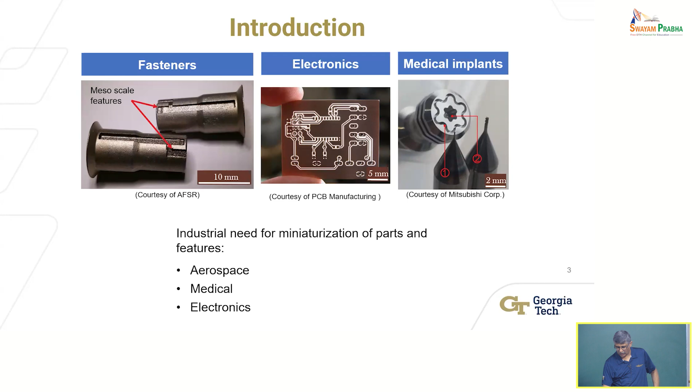So that's the goal. But in reality, some of these challenges apply to objects or parts that are on the order of a few millimeters, okay? Like the one example I showed you earlier on, which is the fasteners. These fasteners are fasteners that you can hold in your hand. You can see them. They're not that miniature, but they have features in them that are on the order of a millimeter or less, right? And then, so you have to produce in large components, small scale features as well, okay? So those also fall under the umbrella of micromachining.

Okay, so we want to be able to create 3D features in a wide range of materials. And why not just use a laser or some other method, right? Because lasers can machine and there's no contact, there are no force issues or very little, at least if any kind of compliance related errors are going to be minimized substantially. Why not do that? Well, part of the reason is that mechanical removal processes are faster, okay? They're proven, you can generate pretty good surface finishes. You can also, to some degree, control thermal damage in the material, okay?

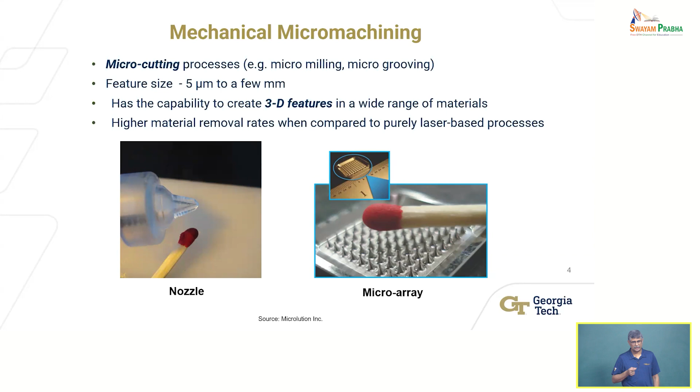And therefore, laser-based, now of course you do have, as Professor Samuel mentioned, femtosecond lasers or picosecond lasers where you essentially are ablating theoretically under cold conditions, without producing significant thermal damage. That exists, but again, they're slow processes generally, okay? The energy densities are much smaller typically. And so they're suitable for certain things, like we're talking about a heart stent that's actually made using a laser micromachining process. So there are reasons to consider using mechanical machining methods.

But what's the challenge? Okay, so now I made the case that there are applications where mechanical micromachining is something that has value. So what are the challenges? Well, if you're going to make small scale features, you need small scale tools. So today you can purchase tools down to 50 micron milling tools, for example, or even less. People have actually produced 5 micron end mills. It's just for novelty. Nobody uses them.

What you can buy commercially, maybe up to 25 microns in diameter, with 1 or 2 flutes or cutting edges on an end mill. You can see one picture here of a typical end mill. It looks like a conventional end mill except scaled down in size, on the order of about 40 microns. Only a small portion, the tip, is where the cutting flutes are, so you're restricted to making small scale features with this.

What's the challenge? Tool strength is a challenge. Now if you're machining soft materials like polymers or very soft metals, then it's less of a challenge. But if you're machining something difficult, you want to make micro scale features in titanium. The biomedical implants, many of them are made out of titanium, chrome alloys, and other types of compatible materials.

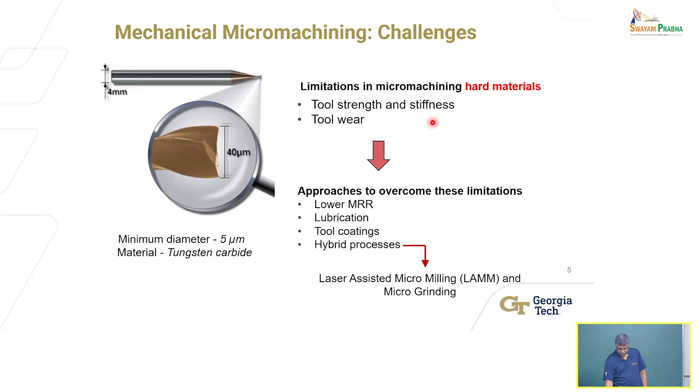The approach is a little different. Softening is one way - thermal softening is one way. It'll work for metals, it'll work for certain non-metals as well, certain ceramic materials will work too. But usually ceramics have a very high softening temperature - that's the strength they need, that's why you use them, for good wear resistance and so forth.

So the basic idea is illustrated in this chart, where you see that you have a laser beam. Laser is one way, it's not the only way - you could use some other energy source to generate thermal softening.

But lasers have an advantage in the sense that they have a very coherent energy source. You can actually tailor the properties of the laser, in particular the wavelength, to match the material. And also you can control the size of the heat source by controlling the spot size, and you can control the energy density as well. Even with a low power laser, you can reduce the spot size, and that power or energy irradiated on the surface over a very small area will give you very high energy densities. So those are the advantages.

And laser technology has come a long way. Today you can actually get laser pointers, a lot of you use them, and obviously they are designed to be safe for you to operate. There are different classes of lasers that Professor Samuel may have talked about, so they belong to a class of lasers where they don't present challenges. But anything we want to use here would be a laser with sufficient energy density that can actually harm us physically.

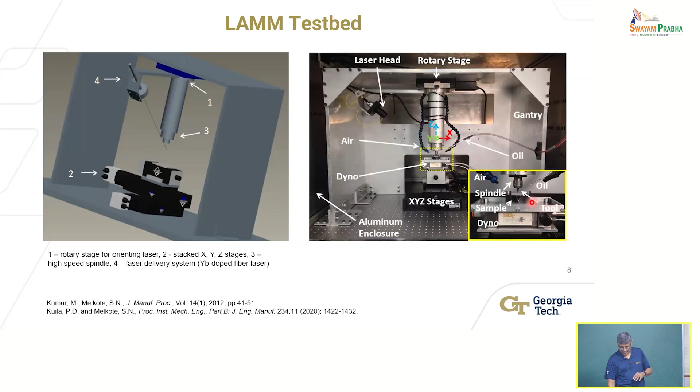So this is a test bed we designed and built for us to do basic investigations. There's a version of this even earlier where we were doing simply a planing operation. One of my former PhD students, now a professor at IIT Bombay, his PhD work was the first one where we did this. But that's not milling, milling is more like grooving operations, but the ideas were the same.

Here's an example of what we did when we built this machine. You can make this in hardened tool steel, a tool and die steel, A2 steel, with about 62 Rockwell C, so very hard. It's heat-treated steel, used for dies and molds. You can produce spirals like this, or even circles like this, channels, just to illustrate what you can do.

You can produce features like this, a grid pattern, and more complex things obviously. You can see the size of these things, on the order of about 250 to 400 microns, and even less. You can do 100 micron tools in theory.

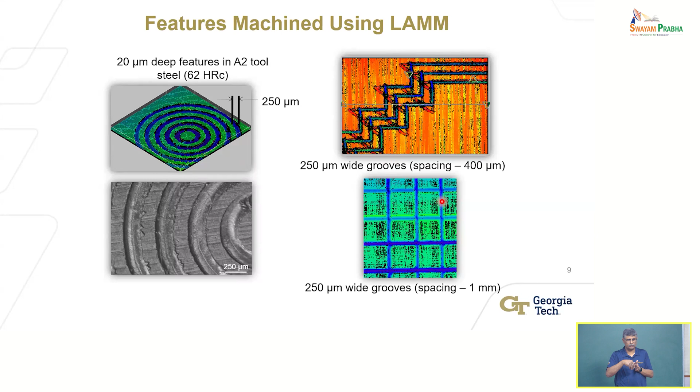Of course, you'll have to control the spot size of the laser to ensure it's not going outside the region that you want to remove with the mechanical tool. So that's the basic idea.

How many of you researchers here know how to measure forces in a cutting operation? What would you use? Dynamometers - there are piezoelectric force dynamometers. They've been around for a long time, used in the lab. You can only generally use them in a laboratory environment to do research; you won't put them on a production machine.

So those tools exist that allow you to measure the forces involved in the cutting operation, which is great, and they have very high sensitivity and accuracies as well. This is a mini dyne, the smaller dynamometer that allows you to make these measurements.

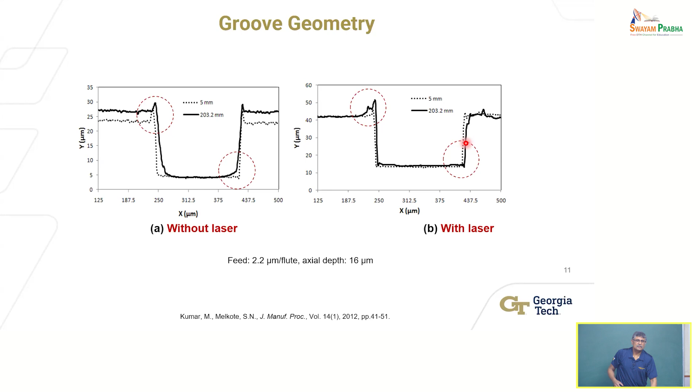Now, I'm making it sound easy. Obviously, in the end, you want some model that tells you what conditions you should use.

So in the end, but initially, this is what we found. What happens to the material below it? As I said, we want to only irradiate the volume of material, soften only the volume of material that the tool is going to remove. Anything more than that is probably bad, because you're starting with a very hard material, and you want the final product to have high strength. Therefore, you want to make sure that after you remove the material, you have not lowered its strength, which would happen if I don't control my energy source or the laser-matter interaction properly, or the amount of energy I'm inputting into the process.

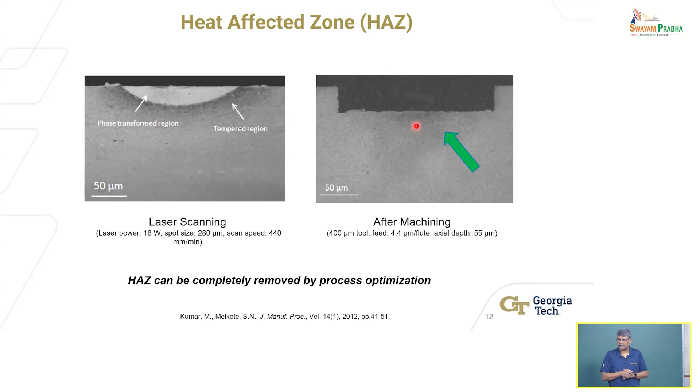So it's possible. All right, what happens to the tool? Well, this is showing you the condition of the tool. This is without any laser assist, the top row, before cutting. You see some material - this is before cutting, so you can see that the quality of the tool itself from the manufacturer isn't so great. There are some things sticking to the surface. This is essentially an uncoated tool, but this could be dust as well - it shows up in a scanning electron microscope as being very big.

But you can see after cutting for about 101 millimeters, there is some rounding of the corners, of the end of the tool. There is also, if you zoom in this region, some microfracturing that has occurred that has led to removal of material.

With laser assist, you see some material adhering, certainly, because now the tool is seeing softer material, so it's going to stick. That built-up edge can be a problem. But you can see that the shape of the tool isn't bad - there is some edge rounding. Now this is cutting twice as long as the previous tool, 200 millimeters, and still it's not too bad, but there is material adhering. That ideally should be removed - it shouldn't happen. You have to somehow get around it, and there are ways to get around it. Without going into further detail, we can talk about it towards the end - ways to actually be investigated, that through lubrication or other methods, you can actually minimize that.

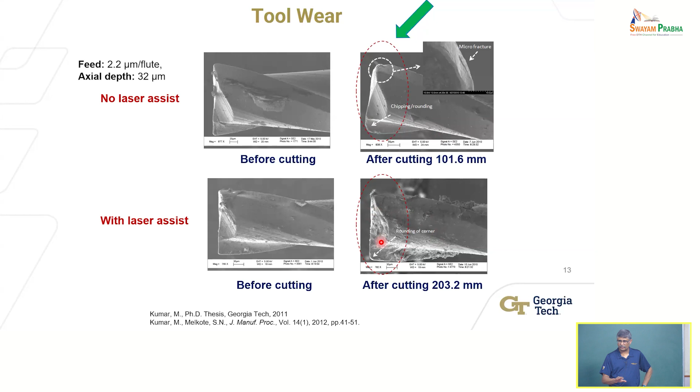Now that was A2 steel. There are other types of materials, right? Every material will behave a little differently in terms of how it interacts with the laser.

This was for an industry project where they were interested in those fasteners, in this case made out of A286, which is a high strength steel. It's an alloyed steel with high nickel content. You can see the nickel content is 24.58%, which is quite high. And nickel, as you know, Inconel is a super alloy used for jet engine turbine blades in the hot section.

So these properties are going to be like that. This is like stainless steel, this particular steel. Its hardness may not be very high, 42 Rockwell C, but tensile strength is high. It does oxidize at 700 degrees C. Obviously, if you're adding thermal energy, you can promote oxidation, which happens much more easily at elevated temperatures.

So we did the study. Now I want to show you a video, since you haven't seen the process. This is actually using fluid, flooding the zone, and micro milling a groove. You can see the groove being milled using some oil-based lubricant here, or coolant.

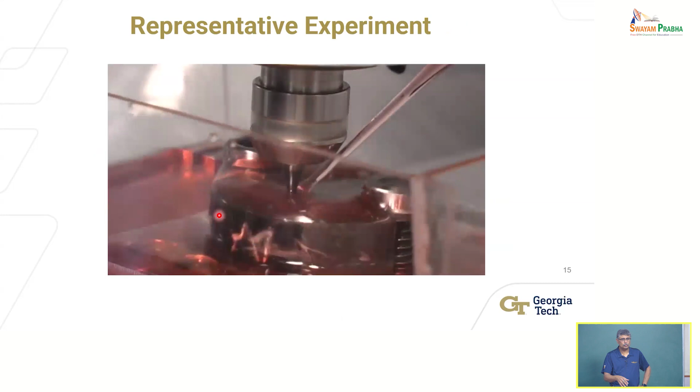But this is without any lubricant, just with the laser. You see the laser, and you can also see the tool is glowing. But the tool is okay, it can still cut.

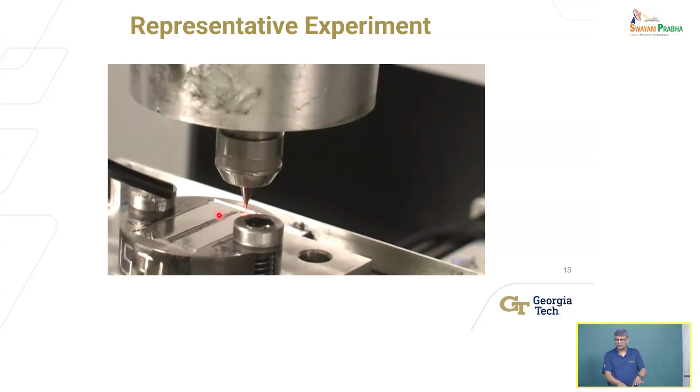But obviously you want to keep the tool as cool as possible, but the material as soft as possible, or heated as much as possible, without melting it. Obviously you don't want to melt it. There will be some ablation, but not a whole lot. That requires some additional methods, but even without that, those results I showed you are using a process like this. This is on our test bed, this video.

This is looking at the geometry, now looking at that cross-section, the depth of the groove along the length of the groove. There's a lot of information here. This is for one condition you see, and for the 4 cases: dry, wet, and with different laser powers. What do you see? The nominal depth was 20 microns, 0.02 millimeters. That is what we were trying to produce.

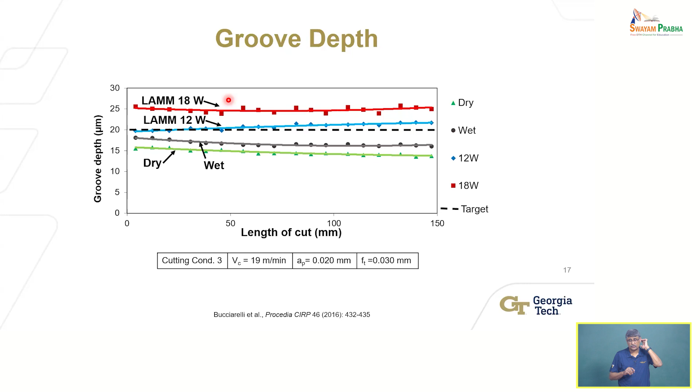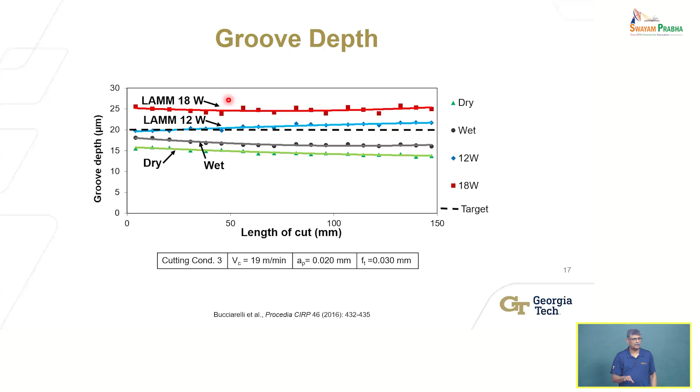That's what's happening, but that's an easy problem for me to solve. I can compute how much energy I'm inputting, estimate the expansion knowing the coefficient of thermal expansion, and compensate for it - meaning if I want to produce 20, I start with something less as my programmed depth of cut. There's a simple solution to it. So that's one solution. But what you do see is that initially, by optimizing the laser power, you can achieve the depth required. That's the point I'm making.

Thermal expansion, how does it increase the depth? The expansion is of what dimension? All dimensions, but usually in this particular case, you're only heating a very small region right in front of the tool, so that's the region that will exhibit the most expansion. Temperature outside the region irradiated by the Gaussian beam is not going to be very high - you don't want it to be, obviously. So much of the thermal expansion is going to be at the point of irradiation and also closer to the tool. There is a distribution of heat, so you will see that thermal expansion.

All right, so you can see here what the tool looks like. This is looking at one edge of the tool, focusing in with an optical microscope. You can see under dry conditions, the tool has chipped - the sharpness is gone. And this is under wet conditions. It's a little better, but it's also worn quite a bit.

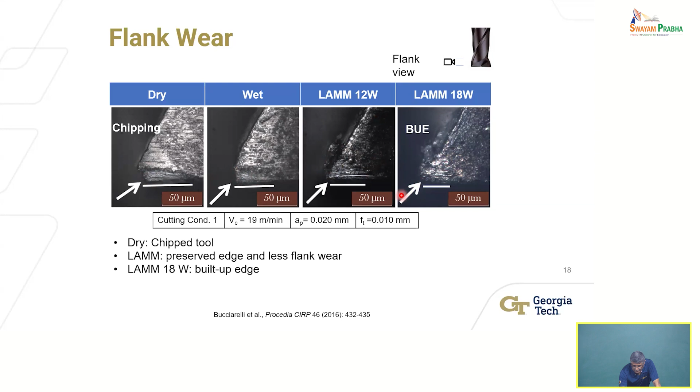This is with laser assist. Not bad - it's still maintaining its sharp edge. There's some material sticking, with higher laser power and softer material - it's going to adhere, etc. So that is to be expected. Not ideal, but expected. This is showing you change in tool diameter because of wear.

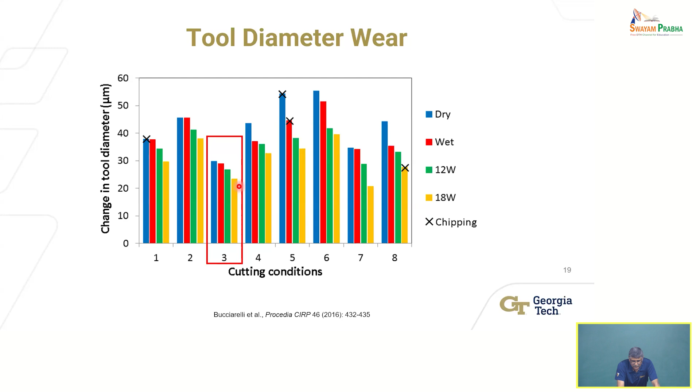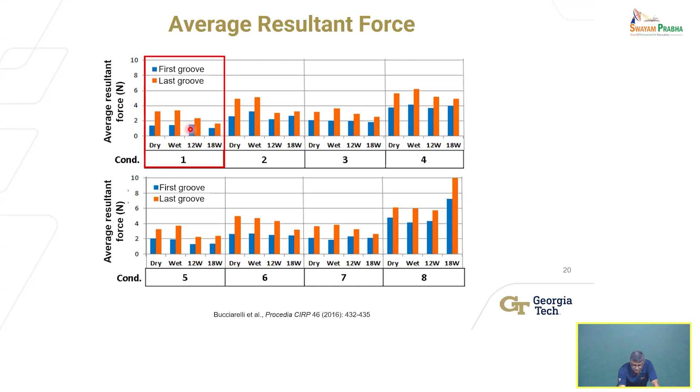So I've presented one idea of how to enable micro-machining of hard metals and alloys, using this thermal softening idea - a very basic, simple idea. Let's talk about...

Other hard materials, such as ceramics. Ceramics are used for many applications - they are very hard, sintered ceramics. Unless you machine in the green state and then sinter it, that's one way people have tried. But usually, there are many applications all the way from medical to non-medical to aerospace applications where you want to produce more complex shapes and features in sintered ceramic materials. You want to use ceramics because of high strength, elevated temperature resistance, inertness to chemical environments, and so forth. So there are reasons to use them, but shaping them and producing these small-scale or even large-scale features is a challenge.

How do they do that in practice? Generally, sintered ceramics are shaped by diamond grinding. They use a diamond-plated wheel and grind - which, as you know, is like a polishing process, like using sandpaper. How long does it take to remove material with sandpaper? It takes a long time and a lot of effort. Grinding is a bit better than hand polishing, more consistent, but you're using a diamond-plated wheel and it's very expensive. That's what they do if you want to produce a groove or something else in sintered ceramics.

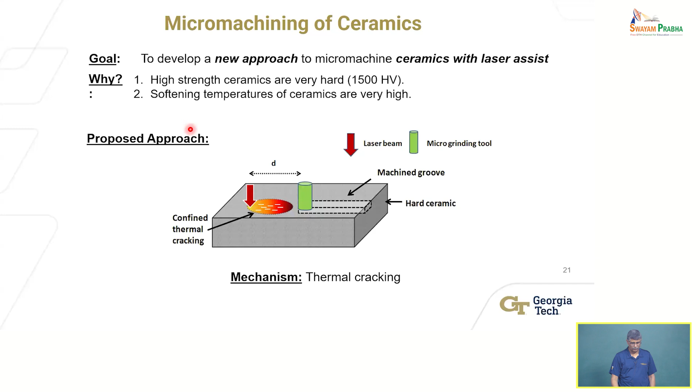That's my hypothesis. In a scientific method, we hypothesize based on our understanding, present a hypothesis, and test it. So that is our hypothesis: can we do this? And indeed, is there a benefit, as I'm hypothesizing, in terms of lowering forces, etc.? So this is what we did.

In this case, crack formation is due to tensile stresses generated during rapid cooling. It heats up and then it's cooled, and it's the tensile stresses generated during cooling, after laser heating.

So I can do this experimentally and do trial and error to adjust the laser power, etc. But instead, a smarter way as engineers and scientists is for us to think about what physics we understand - we have some models. Can we use that to understand what knobs to turn and how to turn them in order to achieve this end result?

We already know the physical concept: I want to generate sufficient tensile stresses to exceed the fracture strength of the material, which I know. So I can use a thermomechanical model. You can do finite element modeling if you want, or there are analytical models that allow you, knowing the energy distribution you're using with the laser irradiating the surface, to compute analytically the circumferential thermal stresses or radial thermal stresses - the different components. Those solutions exist. So we did both in this case.

The only advantage of the finite element model is that you can account for boundary conditions more properly if they're more complex. But if you're only irradiating a very small region, you can treat the whole problem as plane strain or plane stress, and use analytical solutions. It has some limitations, as we will see, but it serves the purpose.

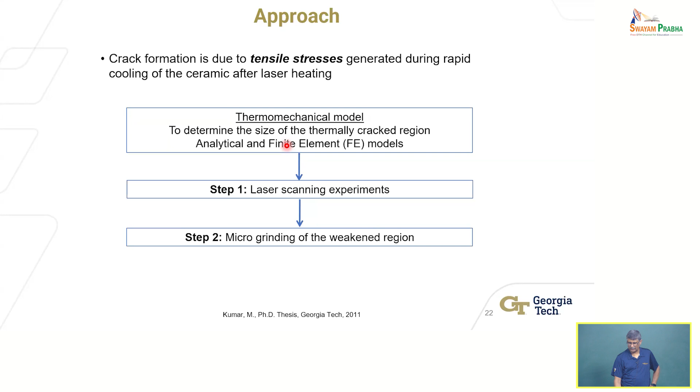So this is the analytical model. It exists - in 1960 somebody worked this out, Boley worked this out. There are some assumptions, obviously - any analytical model makes certain assumptions. The assumption here is a plane stress assumption, which says that H over 2R - R is the radius of the region actually affected by the thermal stresses, and H is the width of this region. They were looking at a disk, essentially. So there's an assumption of plane stress, which we may be violating a bit, but as a first approximation it's an easy model for me to use.

So we did that - you can compute the radial stresses as a function of temperature and coefficient of thermal expansion, alpha, and do the same for circumferential stresses as well. Depending on tensile stresses, where they're generated, they could be generated in the hoop direction or circumferential direction, radial direction, or tensile.

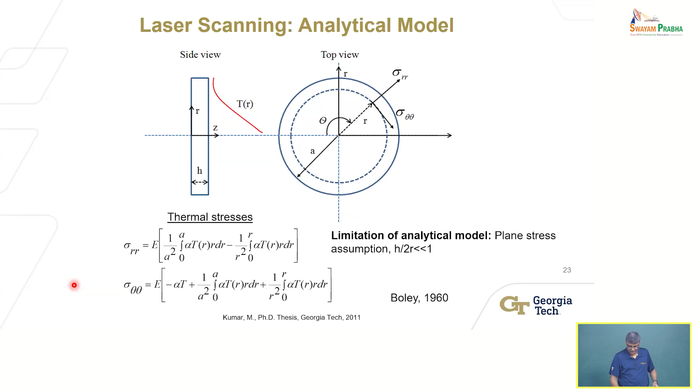If sufficient—whichever one is sufficiently high, that is, exceeds the known fracture strength of the ceramic—then you'll generate cracks, right? That's the idea. So this shows you using that analytical model, in this case with a reaction-sintered silicon nitride,

which is a ceramic, okay? It has a Vickers hardness of 1400, and it's being exposed to a laser, irradiated at 25 watts at a certain scanning speed and a spot size of 280 microns. Under those conditions, this is looking at the radial thermal stress distribution, right? And the fracture strength of this ceramic is 350 MPa. So in this, I put 350 MPa, right?

And this is the distribution predicted by that analytical model for the Gaussian temperature and energy distribution that you're providing as input, as a function of radius, distance away from the center of that circular region being irradiated. You can see that it produces fracture stresses exceeding or at least equal to 350 megapascals up to 195 microns from the center. So within a radius of 195 microns, I should generate thermal stresses that exceed or are equal to the fracture strength of this material, okay.

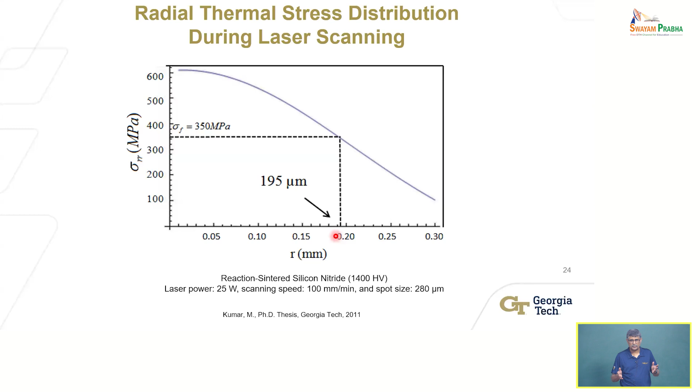So that tells me, by changing my laser power, scanning speed, spot size, I can play with those to determine what size region I want to generate these thermal stresses that exceed the fracture strength of the material using such a model. That's a much smarter way for us to do this, rather than just trial and error, which you would have to do experimentally. It's expensive to do—you don't want to do that. So that's the advantage of this.

Now, we are making some assumptions here. How good is my plane stress assumption? It may not be a perfect assumption in my case, given the geometry—I'm using a block, not a disk, and so forth. So the boundary conditions could be different, or the assumptions being made in terms of plane stress may not be as good. We will see—so we want to test that hypothesis as well.

So we use a finite element simulation where I can relax many of these assumptions and apply the boundary conditions. For boundary conditions, every node starts at room temperature, or in this case, whatever the temperature distribution is being imposed by the laser on top of it. Then you fix all the other nodes at the bottom, because you don't want rigid body motion—otherwise you won't be able to solve the problem. And you solve this, it gives you the temperature distribution.

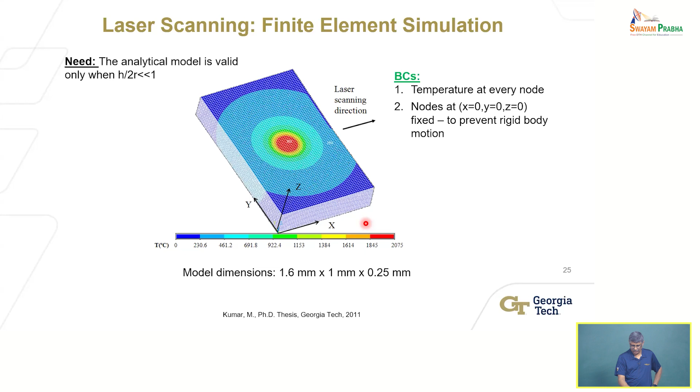From the temperature distribution in a finite element model, you can also calculate the stress distribution. So this is showing you the radial thermal stress distribution for, in this case, scanning in this direction at some point for the same conditions. So I can do this using a finite element model or the analytical model.

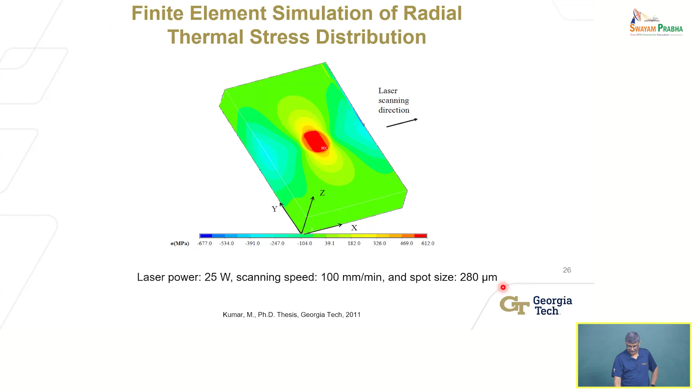This is showing you what happens if I actually do this in an experiment. Same conditions, and I have scanned the surface of this reaction-bonded silicon nitride, and this is looking at the cross section. You can see here that there is a depth of affected region, 30 microns, according to what I can see from this image. And there is a small region here, outside of the white region, that actually is amorphized, okay.

So essentially, it's like taking all these—what is a sintered ceramic? Particles have been bonded together with heat and pressure. So you basically disaggregate these particles, and it becomes amorphous, like powder. Powder is amorphous, right? So that's really what has happened here.

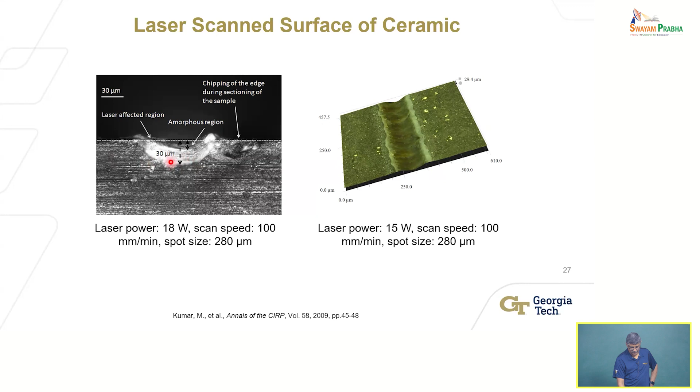And you can see that indeed there is also some ablation—you can see there's already a groove that has formed of some sort. Some of it is because this amorphized powder can fall off, since it's already weak—I don't even need to grind it, okay. But the region below it is weakened, but it's not amorphized, okay.

That's what has happened. So now, this depth of the heat-affected region—I can predict it using this model, because I have a model which tells me what the distribution of radial stresses and circumferential stresses in this volume are for given laser parameters and scanning conditions.

So here is a comparison of using the analytical model, the experiments, and the finite element model. Depth of heat-affected region, I showed you a picture, 30 microns.

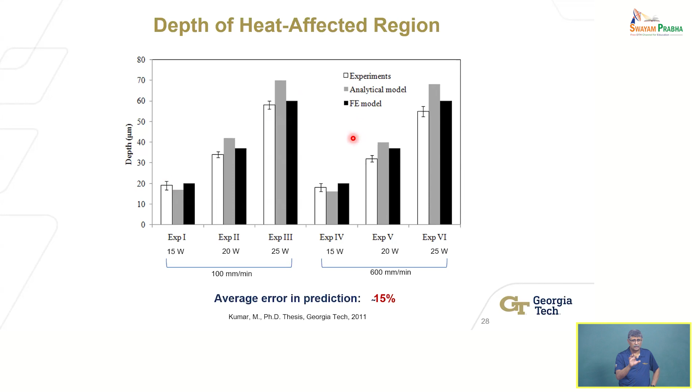In this case, changes when you're varying the laser power. Here the laser power is increasing for one speed - this is slow scanning speed. The next one is same laser powers, same trend, but for a higher scanning speed. In general, at a higher scanning speed, you can see the depth is a little less. Any idea? Does this make sense to you that at a higher speed, it's less? The depth to which I am impacting the material and weakening it is less?

Less heat generation at higher scanning - why? Higher speed changes the rake kind of. There is no rake, there's no cutting here. There is absolutely no cutting. I'm just scanning, there is no cutting at this point. This is only scanning the surface with a laser. Interaction time is less, exposure time is less. So therefore, obviously, the mechanism by which heat is transmitted is through conduction when laser and matter interact.

And so indeed, yes, you're right that it is less, and it's less because at higher speeds, lower temperatures are produced due to lower interaction time. So it's not surprising - this type of common sense check you should be doing. Does this make sense? Does this result make sense based on my physical understanding of the process? Don't accept everything that you see. You have to question it. Am I getting it right?

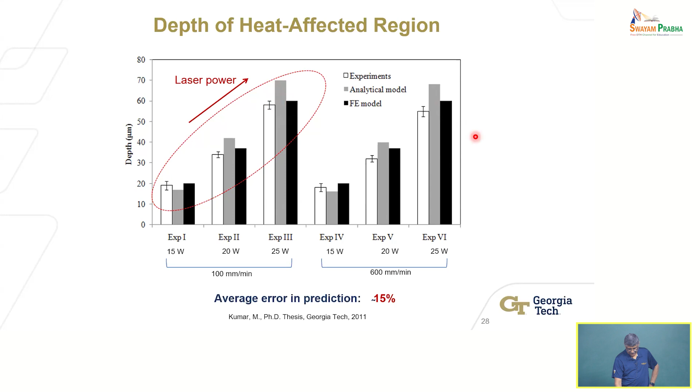So because of that, we need to scan - this is what has been done. But when we have overlapping passes, reheating is possible. Yes, indeed, that would complicate things. It could, but the thing is, you have already cracked regions. So at most, what would you do? You would probably burn off the binder some more because it's already amorphized. Or below the region that is amorphized, you would further crack it, maybe. So that's not a bad thing - as long as it's within the depth to which I want material to be weakened, it's okay. So indeed, yes, you are affecting it. Now, that overlap, the design of how much that overlap should be, also needs to be optimized.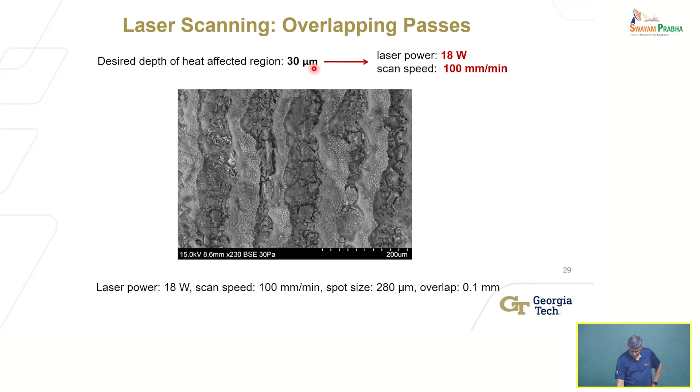All right, so we did this. Now we grind - now the cutting tool comes in. After I weakened it, now I take a tool and it's like me taking a tool and scraping off. Intuitively, that's what I'm trying to do.

So here is measuring the grinding force. In this case, you can see it's for one condition - I gave you some data, you want more data that's in that paper. Laser power of 15 watts, spot size of 280 microns. And you can see here, without and with, there's a number of grinding passes, because you can't remove all of this in one pass. Because some region is amorphized, very weak, but you want to produce a 30 micron depth. Below that, it's weakened, cracked, but not completely amorphized to just fall off - it requires some force to remove.

So there are some forces, but you can see here that in general, the average and maximum forces are shown - this is basically the average force, the solid lines, the dashed lines are the maximum values. And you can see that for the laser assist, it's much lower. So I've tested and proven my hypothesis that this will benefit my ability, make it easier for me to remove the material.

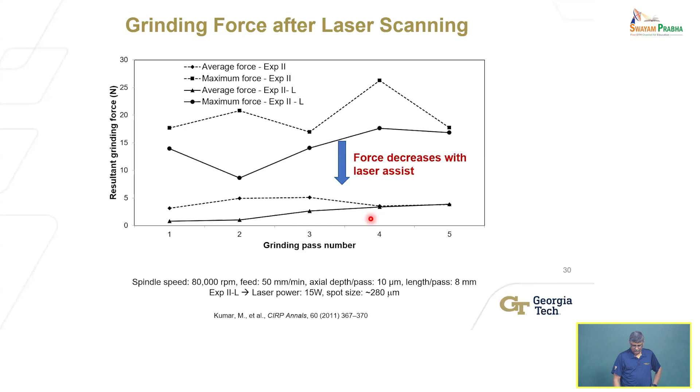Back when we were doing this, we found only one vendor. Now the Germans actually make better quality tools, and today you can buy much higher grade diamond micro grinding pencils. This was almost 15 years ago when we did this.

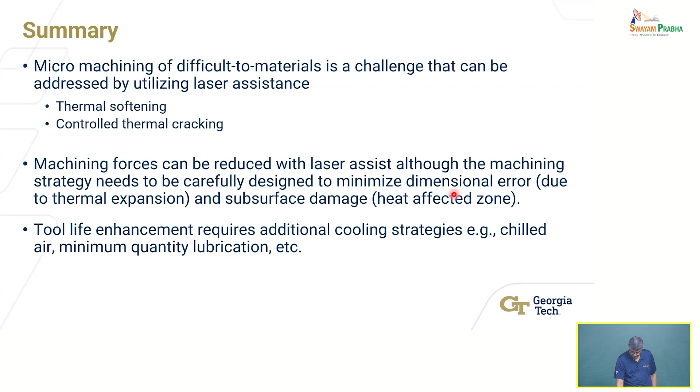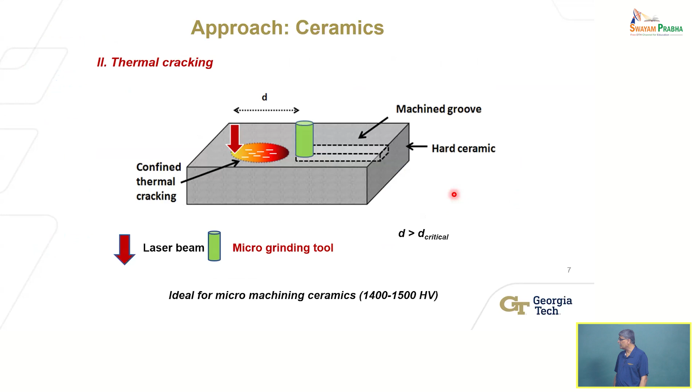The basic idea is quite simple. This is thermal softening for metals. You have a laser that is irradiating the volume of material in front of the tool. The tool is moving in whatever direction, but there's a laser spot directly in front, some distance away. That distance d is a process variable you have to adjust and optimize. The region irradiated, shown by the red circle, is affected by the laser interacting with the material, and heat is generated when laser-matter interaction occurs, which I'm sure Professor Samuel talked about.

So that heat softens the material directly in front of the tool. By the time the tool comes, the material it sees is softer than it was before the laser irradiated it. That's the basic idea. What happens to material when you heat it? It softens. A very simple concept.

Sir, why can't the laser be tailored to the dimension of the milling area, since it's basically a rectangle? Indeed, it can be tailored to a rectangle to minimize the area—that's called laser beam shaping. But it's not simple, you need much more sophisticated optics to do that. Why do I need to do it? I mean, you can, but just because you can doesn't mean you do it. It has to be economical. If you have lots of money and time, then you could do that.

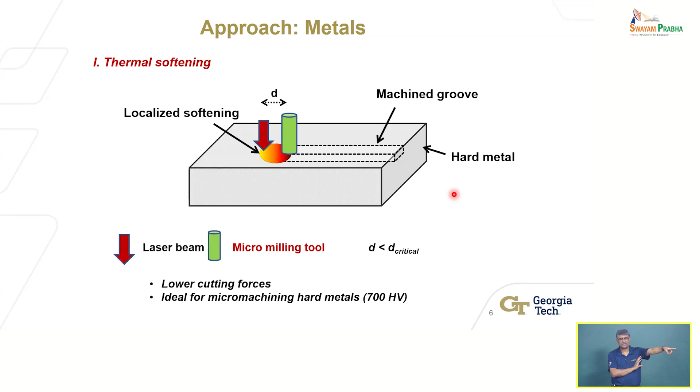Sir, in case of ceramic machining, one phenomenon is there, like brittle-to-ductile transition—you need to maintain a certain speed to get the machining. So with the help of this laser heating, does this phenomenon still exist, or can we machine it as if it were a metal or alloy? The way people have done ductile mode machining in ceramics is by taking advantage of the brittle-to-ductile transition, which occurs under certain conditions of stress you can generate in the material. Generally at very low feeds you will generate brittle-to-ductile transition. We are not even making use of that here at all.

That's what you would do in diamond grinding. In diamond grinding, you're removing very small amounts of material, more than likely because you don't want chipping, you don't want brittle fracture. You can't control fracture because then the geometry will be whatever it ends up being.

Diamond grinding occurs under conditions where the brittle-to-ductile transition is the mechanism being taken advantage of. Here, we are not doing that at all. Instead, we want to weaken the bulk of the material, but that's a very slow process because very low feeds are needed, which means it takes a very long time to produce a relatively large, though still micro-scale, deeper feature. So here we are not even bothered with that.

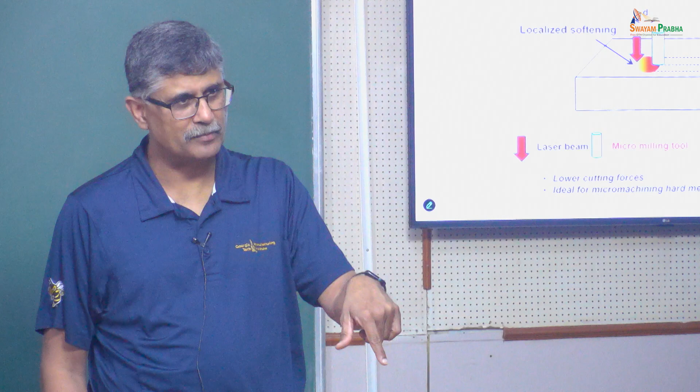What about the dimension accuracy of high aspect ratio holes? If the target depth is more than 200 microns, I think there are limits to what you can do with this approach, with laser, because as you said, in one shot it's difficult to do. Because if it's a high aspect ratio hole, you would have to do it in stages, something like percussion drilling, in steps basically. And therefore, you're going to be limited to some degree in aspect ratio, in my opinion.

If you're doing a hole, it's a drilling process, so you can't really use this configuration at all. This is milling only, it'll not work for drilling, because then how do you soften the material is the question. You have to have the laser pointing ahead of it, and beyond a certain depth, the laser will be occluded by the surface surrounding the hole. You won't be able to irradiate the bottom of the hole. So it's limited, you really can't do that with this process. Taper formation is also an issue. Yes, that too. But even assuming you're going to do this in multiple steps, there's only up to a certain depth you can do this, beyond which the bottom of the hole will not see the laser. So that's a limitation.

Thank you, sir. Sir, about the heating of the tool, we are always trying to cool the heated tool. Is there a way we can insulate the tool, like a coating or something? Indeed, is it practical? It is practical, and we have investigated. I didn't go into it, but we have some papers actually looking at coating the tool using insulating materials, using ceramic coatings.

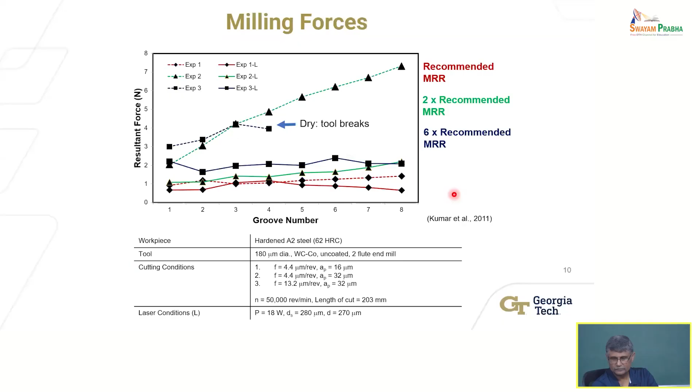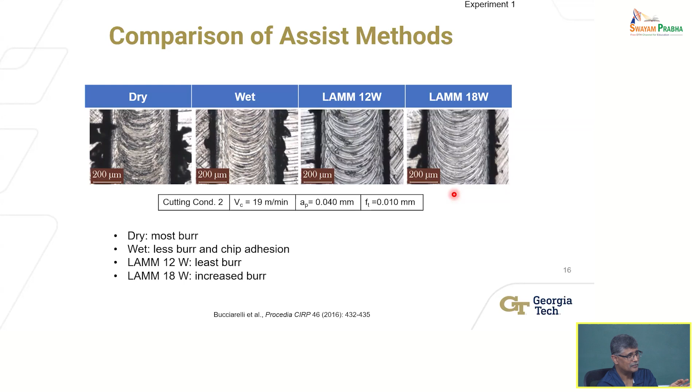You're softening the material, so when the material is softer, it flows more easily, and material gets pushed out to the sides. You can't have zero burrs - it'd be great if you have zero burrs, but even in laser micromachining, with no mechanical tool, you have burrs. If you laser drill a hole, purely through laser percussion drilling or regular laser drilling, if you look at the cross-sectional view at the rim of the hole, you'll see ridges. It's not avoidable, but the reason that's happening is because you're softening the material, and material flows more easily to the side. It's being pushed to the side.

Usually it's analogous to what happens in drilling - in conventional drilling, you produce an entry burr and an exit burr when it exits. Think about milling - the tool is entering, there's a burr on the left-hand side as it's rotating. Exiting, it's producing some burr, because the chip thickness is very small at those points, so material cannot be sheared easily. It's being pushed - that's why it's happening. And when the material is softer, you're pushing more, it flows more easily when you push on it. That's the reason why.

Okay, maybe last question - it's 12:30, I have one more question. Actually, if I increase the length of machining, it may affect the force on the cutting tool. I didn't understand your question. If I increase the cutting length, suppose you are doing 18mm like that. So when I increase that cutting length, it may vary the cutting force also. Sure, the more you cut, the tool will wear, and with wear, the forces will increase.